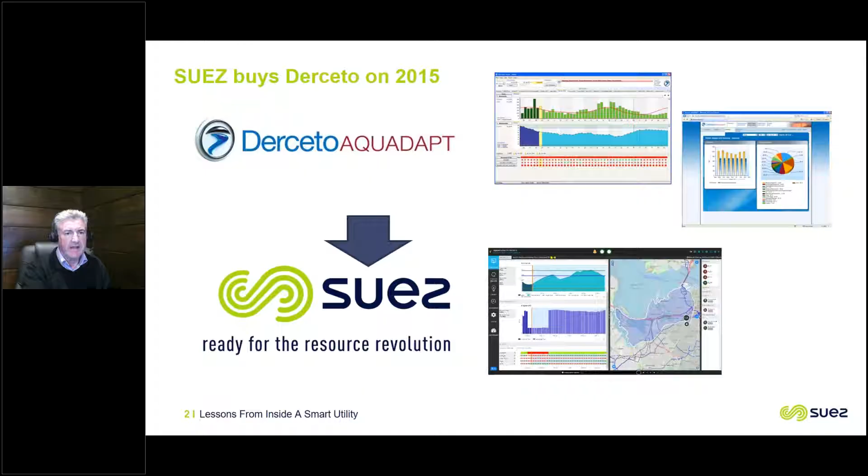To start, I might mention that in the UK, you may have been aware of us as Derceto Aquadapt, which is what we were called from 2000 until 2015, when Suez acquired Derceto, and we're now part of Suez Smart Solutions. That acquisition has allowed us to develop the product a lot more and integrate it into what Suez calls the Aquadvanced suite, but I won't mention too much of that.

So what is Aquadvanced Energy? It's an energy optimization system for potable water, and it looks at all aspects of energy. In fact, I should really call it an operations optimizer. It's designed to look from taking the raw water, whether it be from boreholes, rivers, lakes, and the like, the treatment process, including any chemical addition costs and energy costs, but mainly it's focusing on energy, and in that it's mainly focusing on efficiency. So it's trying to work out which pump or combination of pumps to use to maximize energy efficiency in the network.

And by that I mean specifically specific energy, which is the kilowatt hours per megalitre of water delivered. It takes into account load shifting, which makes sense when you have time of use tariffs or spot market tariffs, which about 40% of our customers use. It looks at things like the path that water can take around the network, and it looks at demand allocation in the network.

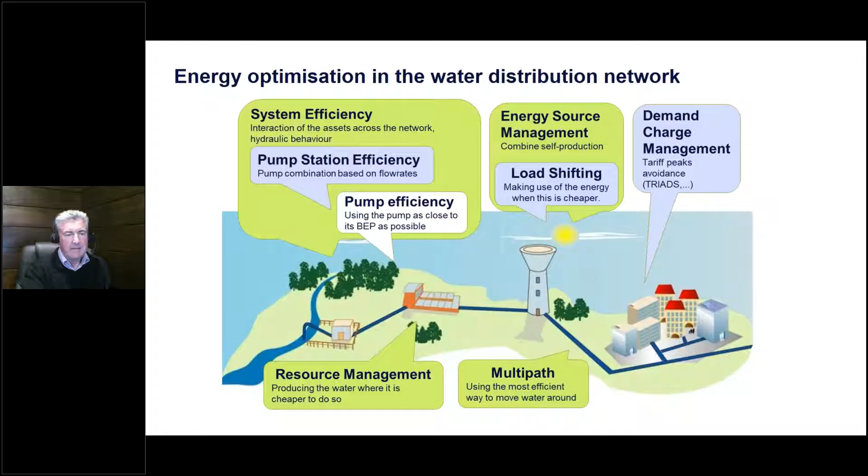So how does it work? It reads live data. So it pulls information from the SCADA and telemetry system, and from that, it predicts water demand for every DMA or every pressure zone or every pump station. However you think of the network is the way it thinks of the network.

It then takes that information on demand and passes it through to an optimization engine. And that works out a strategy for every pump, every valve, every variable speed drive in the network in half-hour blocks of time, so 48 periods a day for 2 days. And it works out a schedule working forward on how to operate the system to keep within all constraints of pressure and storage levels, and do this while minimizing the energy and production cost.

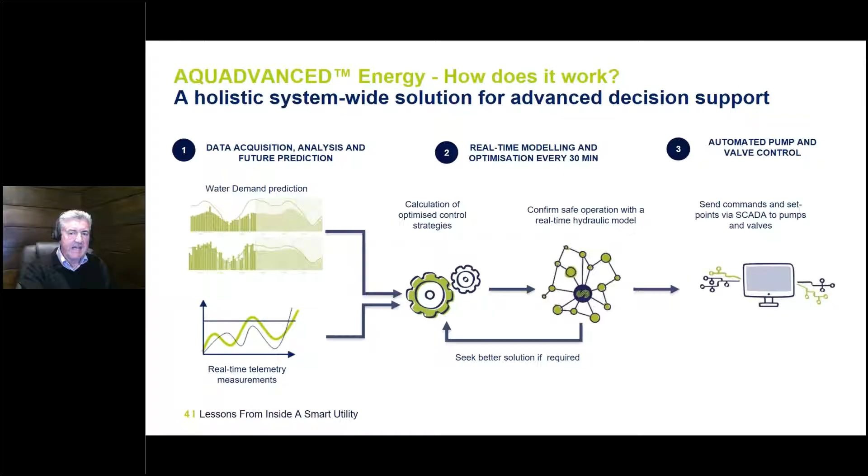Finally, it's a fully automated system. It's designed to be end-to-end. So it sends the commands via the SCADA system. It sends set points to variable speed drives, it sends set points to PRVs and PSVs, and it starts and stops pumps. So I'm going to hand over now to Dave Walsh, who will take you through one of the implementations we did first here in the UK.

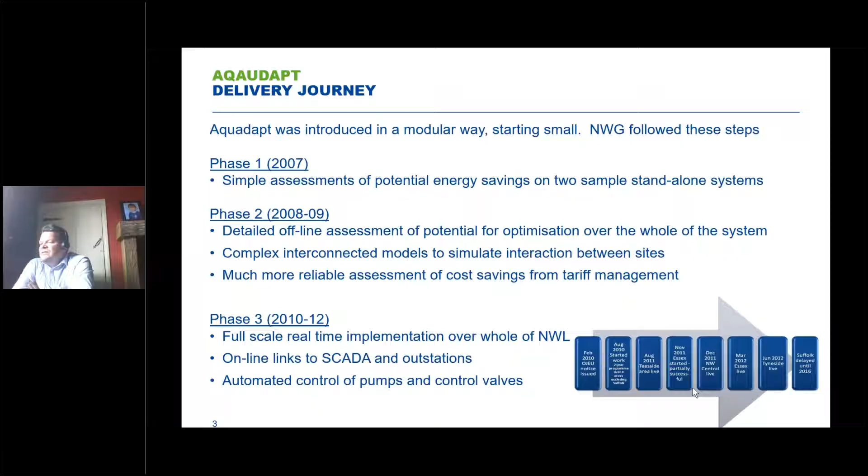And then we established our automated control of pumps and control valves. The little diagram on the right details the journey from the place in the EU Journal Advert Notice in February 2010, and shows the modular approach where we started work in August 2010. We then delivered the first system in August 2011 into our Teesside system. Then in November we delivered into Essex, and rolled out from there.

So at the moment where we're sitting today, the software is working very well across 4 of our operational areas.

So a little bit of background about NWG. You can see on the map on the right, we're an unusual model for a water company in the respect that we have Northumbrian Water Limited in the northeast, and then Essex and Suffolk in the southeast of the UK. We serve about 4.5 million customers across those 3 regions, and we produce and move about 1,100 million litres of water a day.

So the enabling works that we needed to do, again it links back to what Simon said earlier, we had to look at getting remote control of flow meters, pump controls, remotely operated control valves. So there was a lot of that enabling work that needed to be done up front.

And then the other thing that was interesting with this is the cultural issues that we had to work through for successful implementation. This initiative came out of the regional control centres, and one of the most difficult aspects for us was trying to convince water supply teams to relinquish a bit of control and actually follow the Aquadapt prediction and the Aquadapt model. So the stakeholder engagement had to be extensive, done over a reasonably long period of time, with us going in to revisit treatment teams and convincing them on the merits of the system.

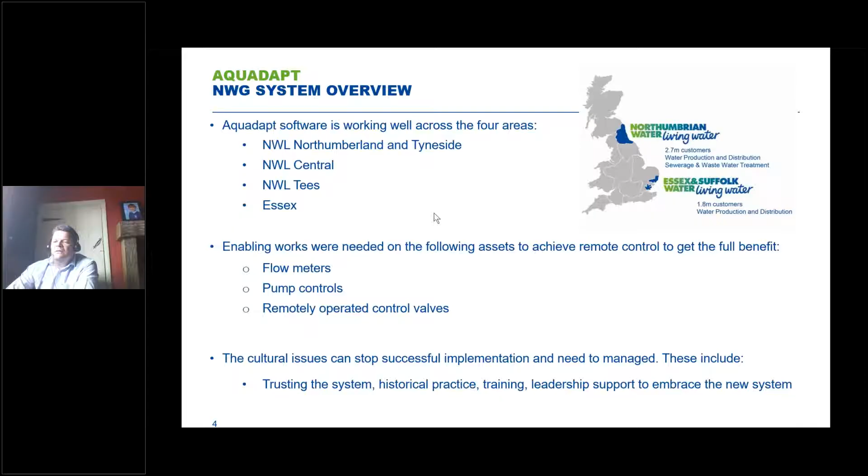So basically, as I said earlier, this is a regional control centre initiative, and it did change how we operated. The guys in the regional control centre became supervisors of the network rather than controllers as such.

You can see underneath what was delivered initially across our regions: control of 23 water treatment works and 5 treatment works in Essex and Suffolk. The reason I've put the NWG total assets next to that - if you look at the water treatment works in Northumbrian and Essex and Suffolk, we didn't get control of them all because we didn't need to get the full benefit. It's a bit like the 80-20 rule.

If you get your significant assets in Aquadapt control - if you get 20% of the big assets in control, you get 80% of the benefit. But if you look at the number of assets that we now have in Aquadapt control, if you're the controller sat at the desk, you cannot optimize that many assets in one go.

The way that we've described it in the past is, as a controller, you will look at the treatment works and the first couple of reservoirs from that treatment works, whereas Aquadapt will look at a full system of treatment works and 30 reservoirs and optimize across that whole system. So that's the way that we've approached this.

And as I said, we haven't stood still with this. This system came into play in Northumbrian in 2010, 11, and 12. But as part of business as usual, every time we bring a new asset online, we will have the discussion and debate whether we can put it into Aquadapt, whether we can have better control.

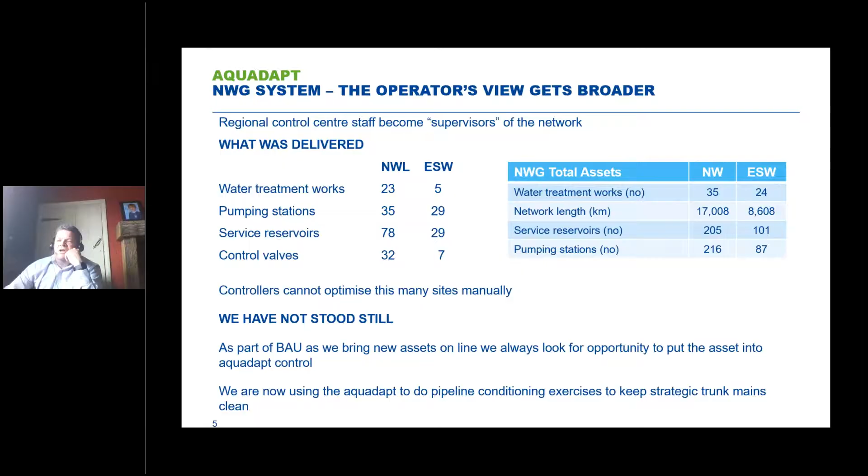So what did it give us? Here's just a few graphs on the immediate difference in operation and benefits that we saw. This is around tariff - the first set of graphs around tariff management and pump efficiency.

If you follow my mouse on the screen, the red line is before Aquadapt, the blue line is after Aquadapt. So the daily flow profile - we are looking to fill reservoirs when the pumping rate is cheaper, and then we're pumping less when energy becomes more expensive. The second one, you can see the cost of power.

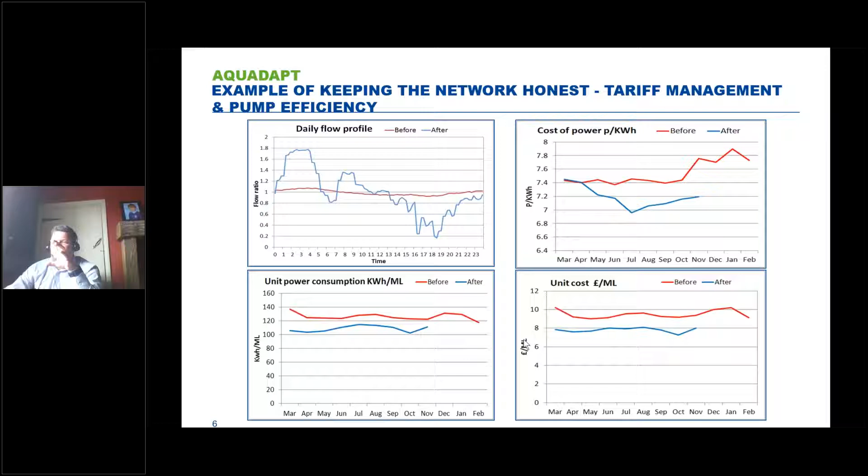Again, this is about selecting the right machine, the most efficient machine. This is about pumping at the right times when the tariffs are cheaper. We're also using fewer units before and after, and the unit cost has gone down per megalitre. So that's a really good visual representation of what we've seen and the benefit that we've seen.

We were struggling to try and take the asset owners with us, so there was a lot of stakeholder work to do. We've since met that target, but just as a headline, we did remove 1 million units of electricity consumption from NW in the first 6 years.

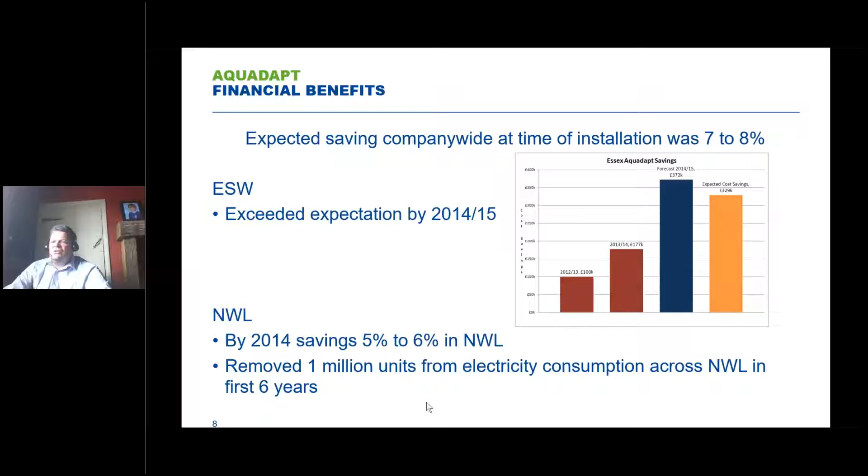And just to summarize this, just to finish off, basically you never stop working with the system. So we get daily reports from the Suez guys, which we are looking at. We are constantly looking as a team for improvements and enhancements in control. We have monthly meetings with the Suez guys and use the support contract quite extensively, which pays dividend for us. And as I said on there, the support service is effective and it's necessary to continuously improve what you do.

Obviously, because the regulatory environment changes, the ODIs change, you have different pressures and you have to respond and react to that. As I said earlier, stakeholder engagement outside of the control room is key to maximising the success, from both an optimisation and a quality perspective.

Control room staff need training in the operation with and without the system to maintain competency. So we have a number of our operators now who only know the world with Aquadapt in it. But again, one of the things that we need to do is make sure that a couple of times a year we switch the system off, and then that gives them an overview of how to operate the system without the support, which also then helps us in our continuous improvement conversations with them and helps us with the development of the system.

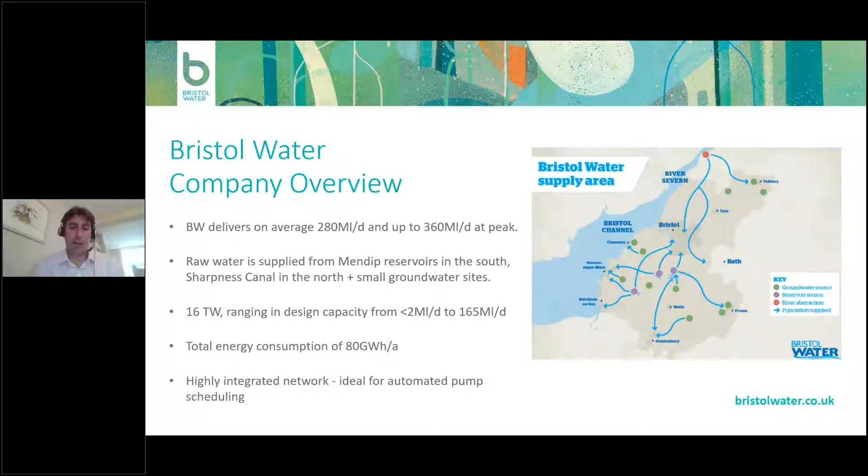Our network is relatively small, but it was and remains highly integrated and already prior to the project quite an automated system, which made it ideal for rollout of a whole network pump scheduling system. So the project, the roadmap to network optimization for us, really spanned the AMP, and like many of us in the industry, we're constantly looking at ways and means of saving on OPEX, especially in the current environment.

So early in the AMP, we were looking at various initiatives, energy included, and it was agreed that an automated pump scheduling system would be taken forward. Shortly after that, we were engaging various suppliers and reviewing various benefits assessments, site eligibility, and thankfully we awarded the contract to Suez. And then moving on to the following year, refining some of that benefits assessment, bolstering the business case and confirming which sites we would like to roll the system out onto.

2018-19, it started to get even more serious. So we spent a lot of time focused on system parameterization. There was quite a comprehensive pump testing process where we tested at least 180 pumps across 70 odd sites. And then commencing with the ICA, IT, and final model design with a small pilot test at one of our sites, just to give us a little bit more confidence going forward.

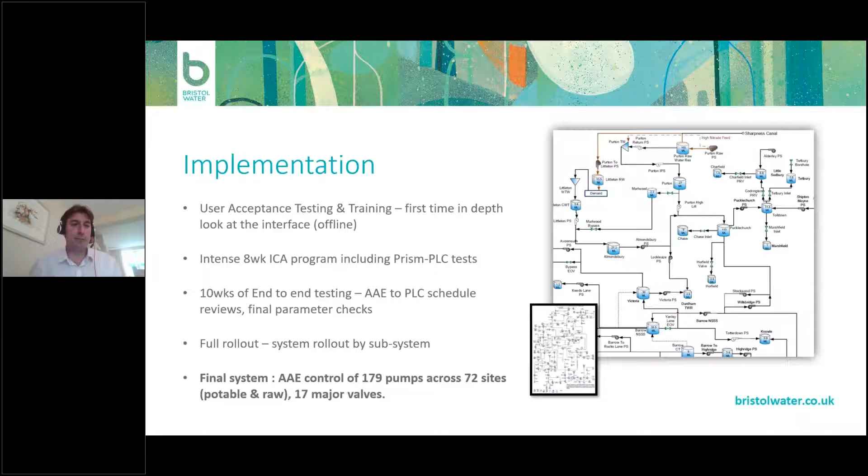So moving forward to where we are, implementation as a project has largely come to an end, and now it's very much my role and the energy team's to work with the rest of the business to move it into business as usual. And we've badged the whole system, AAE and all pump scheduling systems, as a fourth tier of control. It's doing a whole network optimization every 30 minutes and passing out those commands to the traditional telemetry and SCADA system. So tier 3 would be your remote control system, your Prisms, your Scopexes, and tier 2 is your local PLC, slightly more isolated systems.

Now, the reason why this needs to be considered as a whole system is that AAE sits on the top, but to maintain safe operation, you need to have a system that can fall back at any one individual site at any one time if the system goes outside of parameter. So that's really important to us, staying safe. And the other, which David's talked quite a lot about, is engaging staff and stakeholders. So people, process change, development, proceduralization of everything is now quite a big piece of work, and actually has lots of other fringe benefits to us.

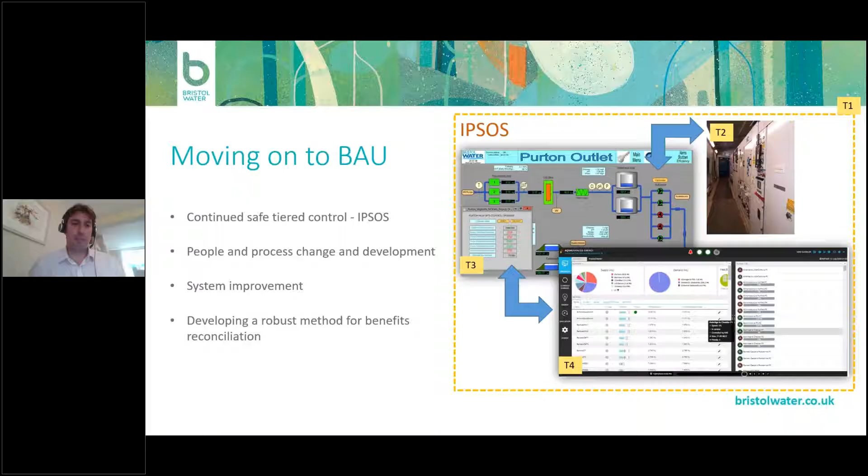So to round it up from me, there's been a series of challenges and successes. For any other companies embarking on this project from a clean slate, you'll find, as you would imagine, and as David mentioned, the success of the system requires operational staff and all other stakeholders be fully engaged, especially the control room. So the project team, including myself, were pretty much embedded within that control room for the entire project, and still now maintain very close ties.

The second challenge would be shared resources. In various companies I've seen, the ICA teams are usually in high demand. So it's critical to delivery of a project like this that they're fully resourced, and there's a recognition from within the company that this is a project that needs prioritizing.

And then the technical issues, so level control, where the actual levels are going outside of forecast. It's making sure that we work with the control room to really hammer down what the control levels should be, and making sure that when it is outside of a forecast, all controls are in place to then also re-establish selection and control.

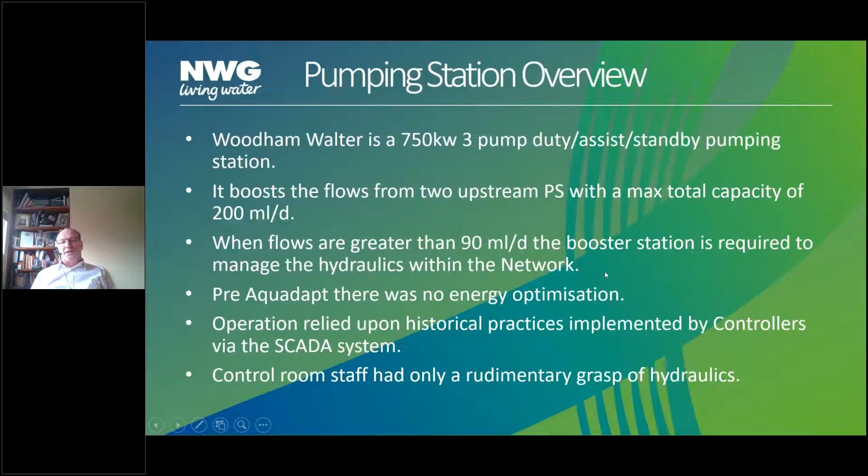So the cost savings side of things tends to be a bit of a conundrum in how to go about understanding what you used to do and comparing it with how Aquadapt operates the system.

So for the first point, we took 2 years worth of data prior to switching on Aquadapt. So 2 years worth of flow data broken down into 30-minute chunks. We appended the kilowatt hours for those 30 minutes, so we know what volume of electricity we had consumed. We compared that to the energy tariff for those periods. The energy tariff, of course, is quite a complex thing in the sense that it has seasonal variations, weekday, weekends. So that all needs to be applied to the data to get a true pounds per megalitre number.

Once we have that bit of information, we then need to make sure that we compare apples with apples. So the way we did this was we looked at banding the volume of water that we transferred through this pumping station in any given day. The bands were broken down into plus or minus 2.5 megalitres either side of a median. Once we did that, we were then in a position to be able to calculate the average cost per volume band. Once we go live with Aquadapt, we do exactly the same calculation again post Aquadapt. And the difference between the pre and post for each band gives us an indication of the savings.

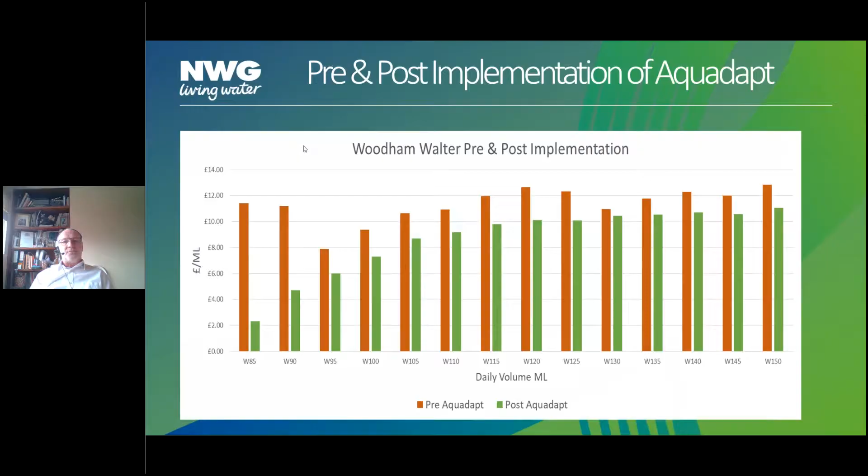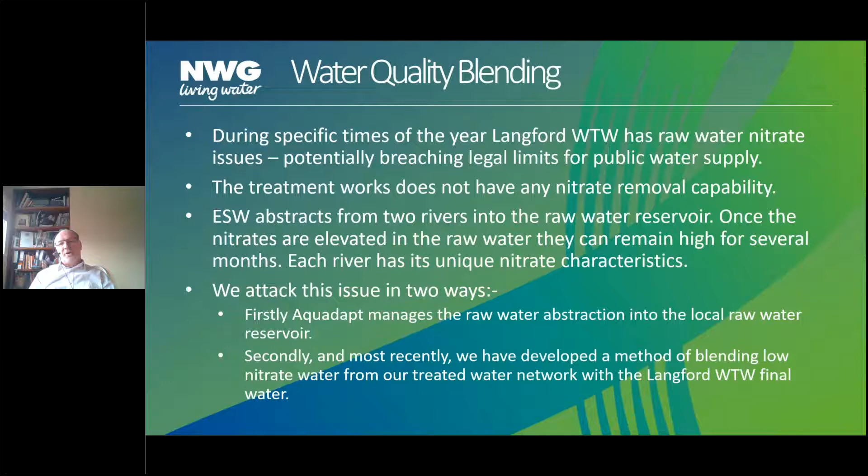We do this by having a laboratory analysis carried out for the three main protagonists: the rivers, the treated water, blend water, the final water coming out of the reservoir. And we use these values to calculate the mass balance required. And this is done in the Aquadapt world.

Aquadapt takes these concentrations that we input onto our SCADA system, and it uses its optimization capabilities to abstract water out of each river, but maintain the chemical concentrations below a prescribed amount in the raw water reservoir. We can only do this so far, because inevitably, generally speaking, particularly when nitrates are involved, the levels do become above the maximum constraints that we're allowed to enter into the public water supply.

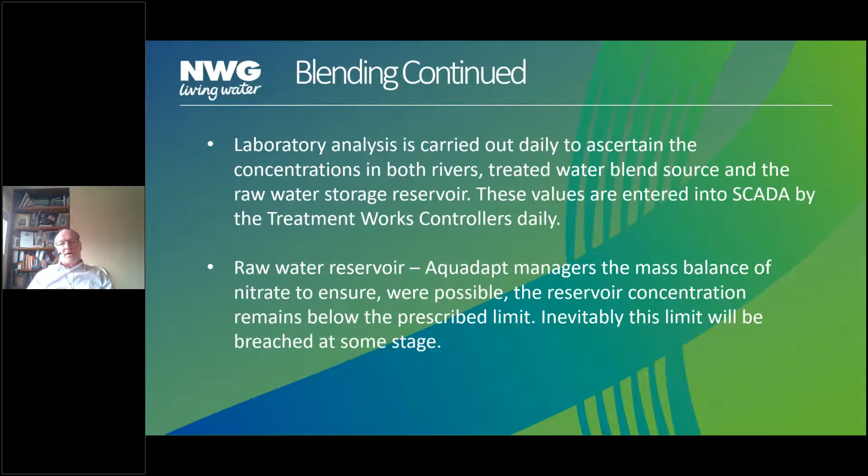So when we have that situation presented to us, we have two choices: we either take the treatment works offline altogether. Sometimes that's the preferable option, but more often of late, we've tended to keep the treatment works in operation, and we blend the low nitrate treated water from another source with the final water of the output of the Langford treatment works. We do this in a slightly different way.

In the SCADA system, we take the laboratory results and we calculate a blend ratio. And that ratio is used in the Aquadapt world in order to set the minimum constraints for our blend water. There is an upper constraint, but that's set at our maximum hydraulic limitations for no other reason. So what this gives us is a minimum constraint for our blend source that Aquadapt must obey. That minimum is applied to the blend valve that we use to do the blending with.

Aquadapt is then free to actually use more blend water if there is a financial incentive to do so. And I expect that to be the case. We haven't commissioned this in anger as the COVID outbreak has put a bit of a delay on some of the commissioning. But with my experience of optimization, I'm expecting Aquadapt to use this blend water as a routine, not as a specific action just for nitrates or for metaldehyde.

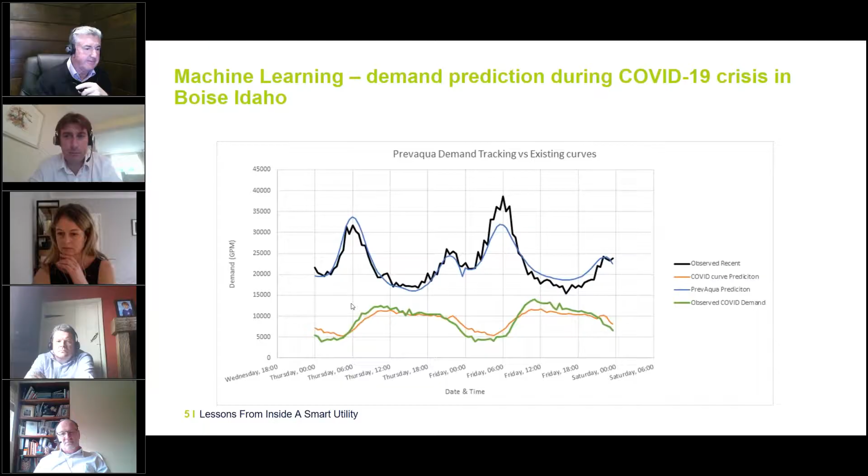And although they were running around and in some cases having a real struggle getting staff in to operate the system, they were very thankful they had an automated system in the background, because it removed the stress of trying to cope with these sort of changes, which they had never seen before, and therefore they had no operational strategy for. So hopefully that answers the question.

Thank you very much, Simon. We have had another question, which is quite a broad question. So I don't know if members of the panel want to jump in on this. It's asking: Northumbrian have been on this smart grid network optimization journey for many years, which seems pioneering and progressive. Do the panel feel there is an increasing trend for broad adoption of this? Perhaps, David, if you want to take that one first.

Yeah, so what do they mean? Adopting the Aquadapt software, or the approach? They mean adoption. So do you think there's a trend in the industry for companies to more broadly begin to adopt the approach of network optimization?

Speaking from personal experience, the number of companies, UK companies, that have come to visit us just to see what we're doing and how we control the network has been extensive over a number of years. We managed to run our network, the Essex, Suffolk, and the North East, with 3 operators, 3 control men. One of the reasons we can do that, I think, is because we have the automation and the software available to us. So I think there is a push, there is an appetite for it. And obviously the likes of Bristol have taken the step and made the change. So yes, I do think so.